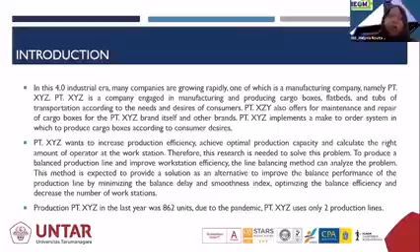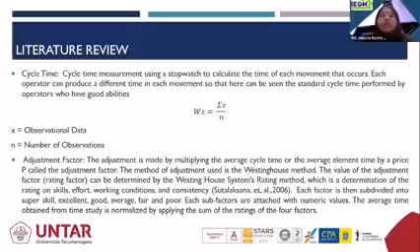For the literature review, there is cycle time measurement using a stopwatch to calculate the time of each movement that occurs. And then there is the adjustment factor, using the Westinghouse method, which is determination of the rating on skills, effort, working condition, and consistency. Each factor is then subdivided into super skill, excellent, good, average, fair, and poor. And then there's normal time. The normal time is the time used by a worker to work fairly without excessive effort during the working day.

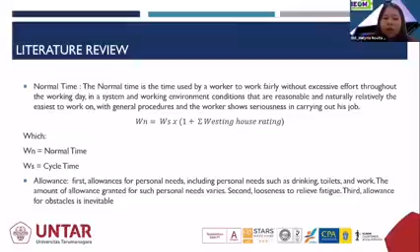And then there's allowance. Allowance consists first of allowance for personal needs, such as drinking, going to the toilet, eating, etc. The second allowance is allowance for looseness to relieve fatigue. And the third allowance is allowance for inevitable obstacles. And then there is standard time. Standard time is what a normal worker takes to complete a job carried out in the best work system.

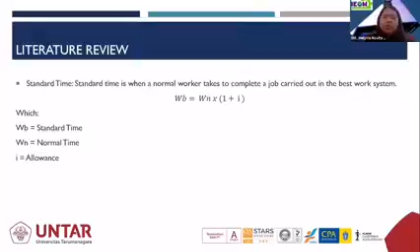And then there is line balancing. Line balancing is a balancing method for assigning task elements from an assembly line to a workstation to minimize the number of workstations and minimize the total idle time at all stations. There are procedures to apply the line balancing method. The first step is to make the precedence diagram. The precedence diagram is made with circle symbols or nodes, arrows, and standard time.

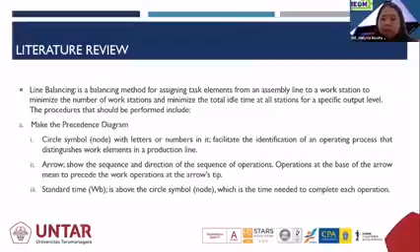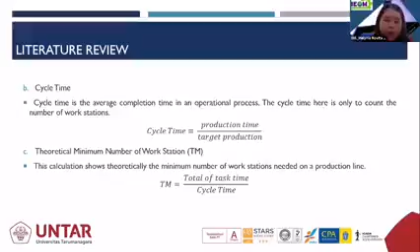And then we calculate the cycle time. Cycle time here is different from the cycle time previously, because the cycle time here is only to count the number of workstations. And then we calculate the theoretical minimum number of workstations. This calculation shows theoretically the minimum number of workstations needed on a production line. And then step 4 is we calculate the balance efficiency. The calculation of balance efficiency is intended as a parameter of the success of the line balancing.

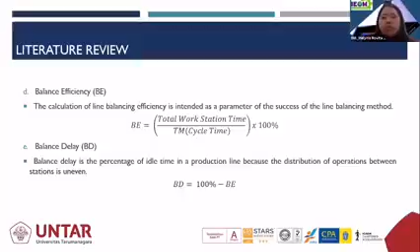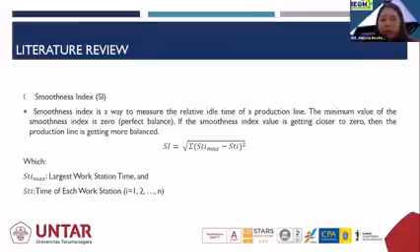And then we calculate the balance delay. Balance delay is the percentage of idle time in a production line because the distribution of operations between stations is uneven. And we calculate the smoothness index. Smoothness index is a way to measure the relative idle time of a production line. The minimum value of the smoothness index is 0, or perfect balance. If the smoothness index value is getting closer to 0, then the production line is getting more balanced.

For the heuristic method, I use 4 methods. The first is rank positional weight. In the rank positional weight method, the weight value is a calculation between the work element and the position of each work element in the precedence diagram.

And I use largest candidate rules. The basic principle of the largest candidate rules method is to combine processes based on sequencing, from the largest operation processing time to the shortest operation time.

And then I use the Kilbridge-Wester method. The Kilbridge-Wester method is a heuristic procedure that selects work elements for assignment to a workstation according to their position in the preferred precedence diagram.

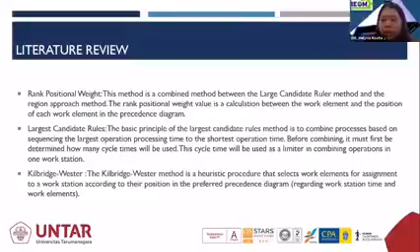And the last method, I use Moodie Young. The Moodie Young method is a line balancing method that has two phases or steps of analysis. Phase 1 is to group workstations based on a matrix of relationships between elements. After that, we can calculate the goal value.

And if there is a time that is smaller than the goal, then the work element can be moved to the minimum workstation, and the next step is doing phase 2. Phase 2 is carried out to distribute idle time evenly for each station resulting from phase 1.

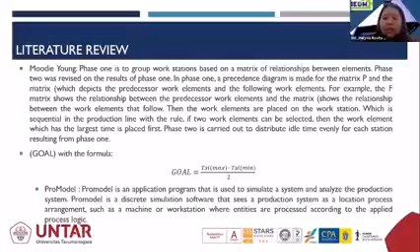And then I use ProModel to validate the result. ProModel is an application program that is used to simulate a system and analyze the production system.

For the research methodology, the first step is I observe in the field and then do a literature study. Then I collect data using a stopwatch on the assembly line at PTXZ. And then I calculate the standard time with adjustment and allowance factors.

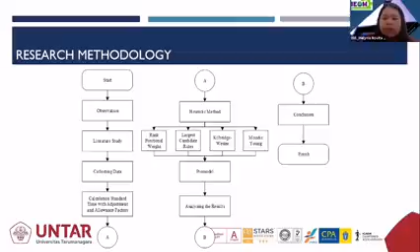Then I process using heuristic methods, including rank positional weight, largest candidate rules, Kilbridge-Wester, and Moodie Young. And then I validate the result using ProModel. And then I analyze the result, we get the conclusion, and then finish.

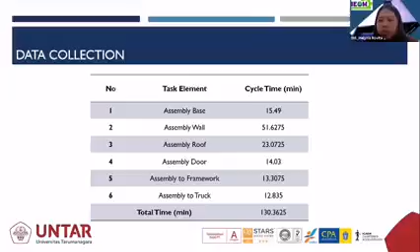2 minutes remaining. Here are some data of the cycle time of each task element in the assembly line at PTXZ. I collect 40 data for each task element, so the total cycle time is 130.36 minutes. And after that, I write the adjustment factor of each task element. Here are the adjustment factors.

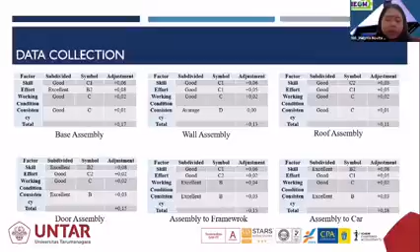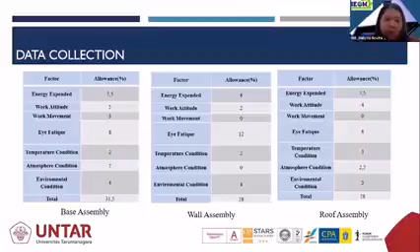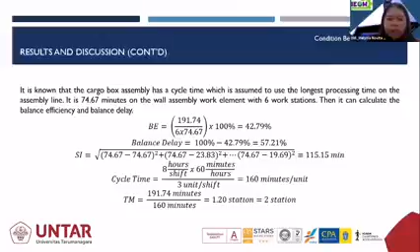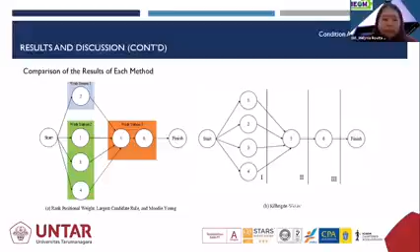After that, I process using the heuristic methods, and here is the precedence diagram after line balancing. The workstations are minimized from 6 to 3. And here are the results using the 4 methods, and the results of the 4 methods are the same. I prepared a video of the simulation using ProModel, so let's see the video.

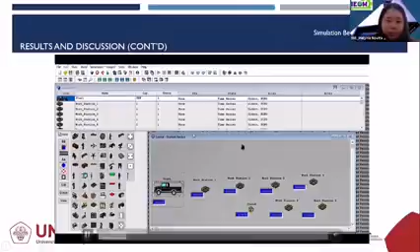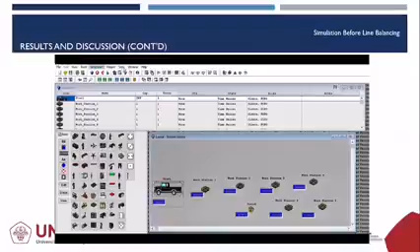Good morning, everyone. I will show you the simulation before line balancing. Before line balancing, there were 6 workstations, and in this application, we can set the runtime according to our wishes in the option. And for the simulation, we just click simulation and click run. Maybe it cannot be visible if I click run. Okay, so we wait a moment until the simulation is complete.

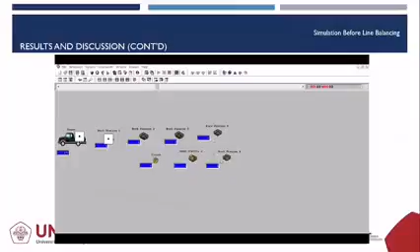And then we can just click yes if we want to see the results. It may not be visible too. Now the output viewer will appear and we can see the scheduled time in location. The scheduled time is 8 hours, and we can see the total entries in the system is 3 units, and the total exits in the system is 3 units.

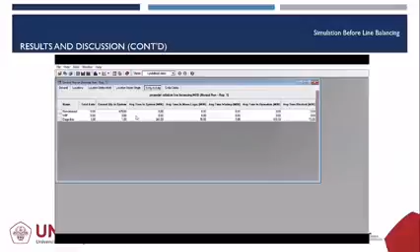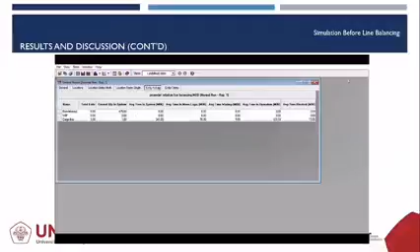The result of the ProModel simulation before line balancing is a product output of 3 units, which shows that the simulation on the line is in accordance with the theoretical calculations. Next is the simulation after line balancing. This is the layout after line balancing. As you can see, there is a reduction from 6 workstations to 3 workstations.

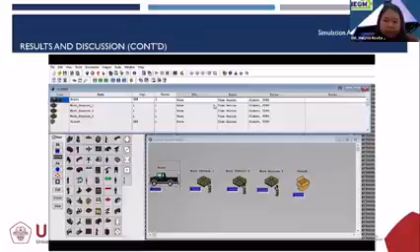The steps are the same as in the previous video, so I will... Excuse me, the time is up. So, could you please speed up your presentation, please?